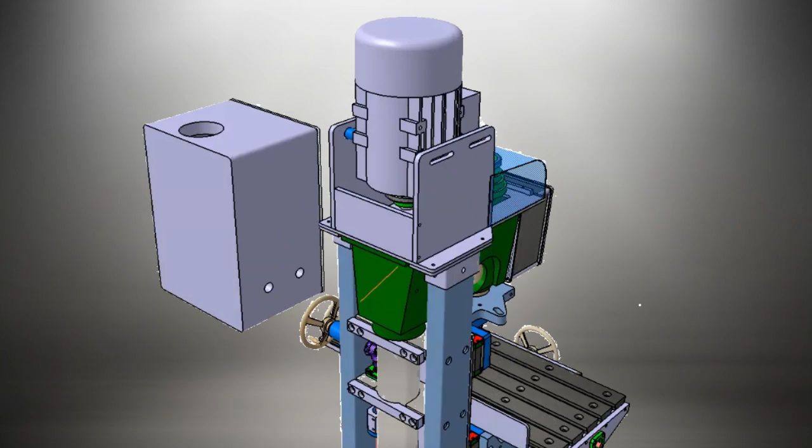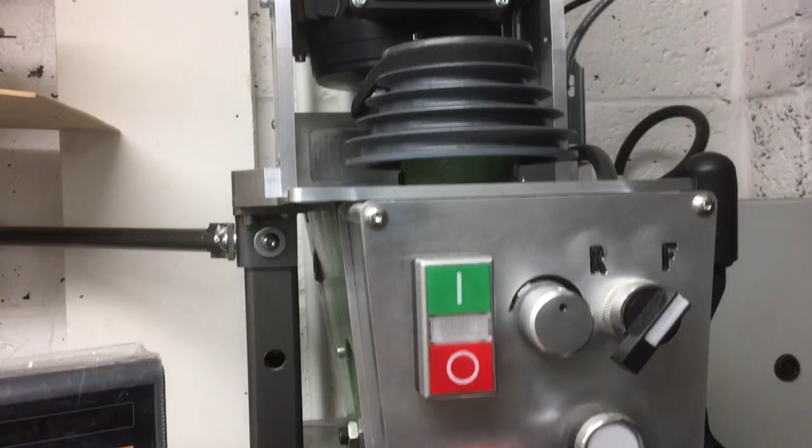In this video series we're upgrading your regular drill press, adding a load more features. First off, we replaced the single phase motor with a 3-phase motor up on top, made all those mounting plates, then we made a custom control box on the front here to control everything, and then we hooked it all up to this electrical cabinet.

In there we've got our inverter that runs the 3-phase motor, there's a power supply that runs the logic relay system, and there's a safety over-temperature relay in there as well.

We also got the digital readout display mounted on the arm and the encoder mounted on the back of the machine. In the last episode you saw me finish off this crank assembly, so we've got the bevel gears mounted on here, so when we turn the crank handle we turn the ball screw and we can raise and lower the table. So next up we're going to make the big block that goes here, sits on the ball nut, and connects onto the back of the XY mechanism to allow it to move up and down.

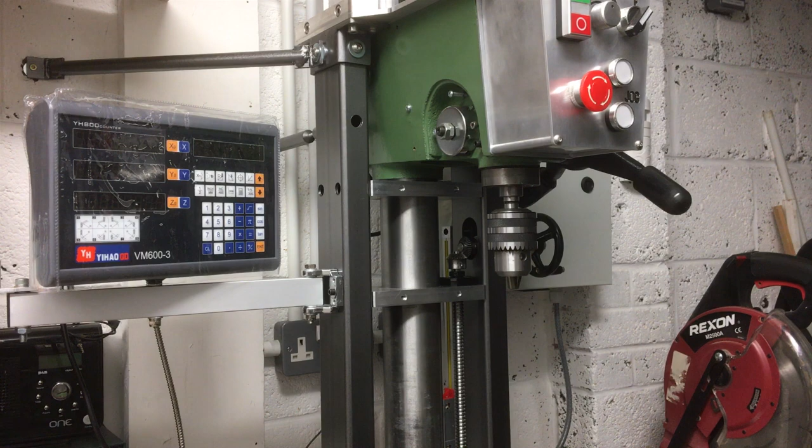So let's go over to the workbench, have a look at the material and the drawing, and let's work out how we're going to approach that.

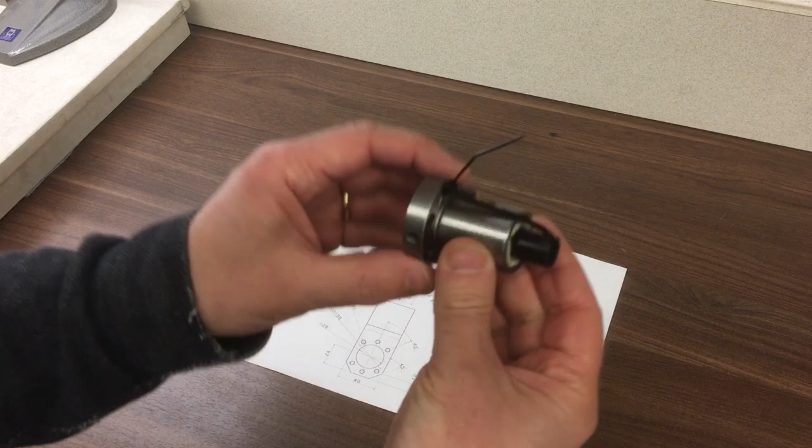Okay, so this is a picture of the part we're going to make. This is a ball nut bracket, so it connects between the ball nut and the part of the XY table. And the ball nut itself looks like this.

This is a 16mm 5mm pitch ball nut, pretty standard item. So you've got your 6 mounting holes there, and then all the recirculating balls go around inside there. It's got this little retainer to stop them coming out.

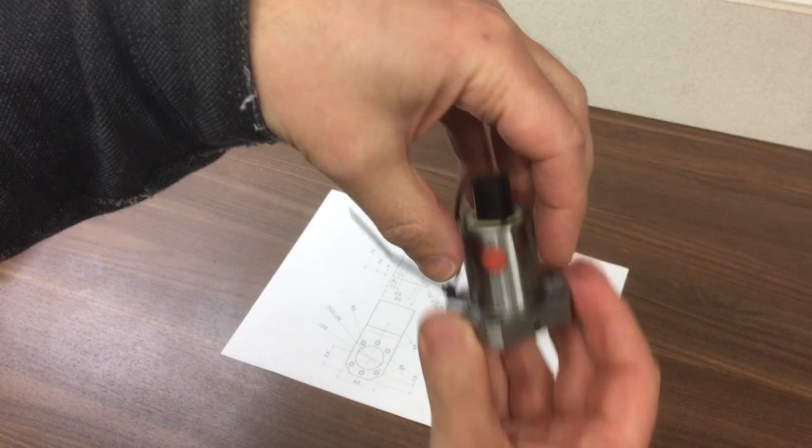That mounts onto the screw, and then the little ball bearings allow it to move up and down nice and smoothly. This is actually upside down, but effectively that will go into there through that big hole, and then it's bolted on at the 6 locations, and then when this moves up and down, it moves the bracket up and down, and this part goes onto the back of the table.

So as you can see, it's not massively complicated, it's just quite big and bulky. Some of the challenges are I'm going to be using this 6mm 2-flute aluminium end mill, so it's got, I think, a 45 degree for aluminium, 15mm flute length - it's not that long - and the overall length is 50.

There's going to be some challenges, it'll be sticking out the chuck quite a long way, or the collet, to enable me to get all the way down there, because we've got 23mm, so that's going to be somewhere up here. But I think we can just about do it.

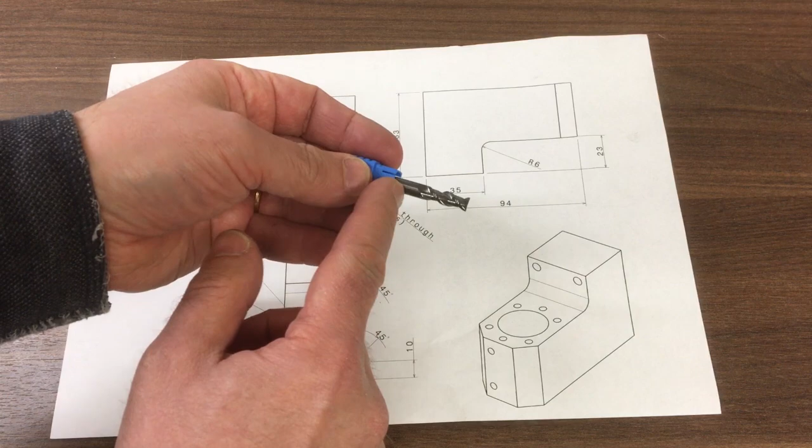We'll just take our time, and then we'll machine that pocket out and run the CAM operations on that. So in terms of stock, I bought this piece off eBay a while back.

It's a solid billet of aluminium. It's about the same, it's pretty square. I think it's about 101 by 101 by, let's have a look, I think it's like 50, something like that. Yeah, give or take 50.

So the first job's going to be just machining this down, just so we've got the blank size correct. And then once we've done that, we can go into the CNC part of the operations.

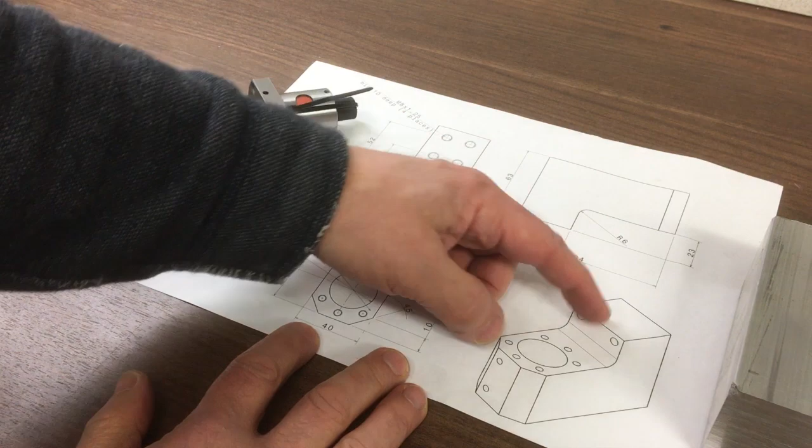So I think what I'm going to do is just rough this out with an adaptive first, a 3D adaptive, and that'll take most of it out, leave a millimetre - I think I'm actually going to leave 0.5 millimetre on the wall. And then we'll come down with a contour, and when we get to this curve part, I'll do that in...

Well, I've got 2 CAM operations that I've programmed in. One is about 0.2mm, and we'll just come down in small steps, and it will leave a kind of very faint staircase type effect on that.

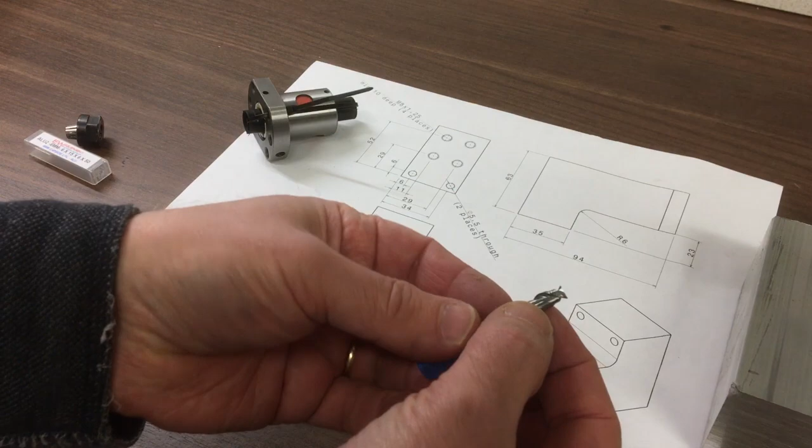So because this is just a regular end mill, it's not a ball nose one - we'll come back to that in a minute. So it'll take that down, and then I've got another cycle which is 0.1mm, which will take a bit longer.

So the idea is we'll run the 0.2, see what it looks like. I mean, it's only a cosmetic finish, it's just to make it look nice around the corner rather than leave a sharp edge.

And we'll see what that looks like. I might just hand finish that, or I can run the 0.1mm. So we'll have a look at that when we get to it.

And then there's just a horizontal surface operation here, and then we'll come in and just take a pocket here about 10mm deep. There's no way I can bore that through there with this end mill, not a chance.

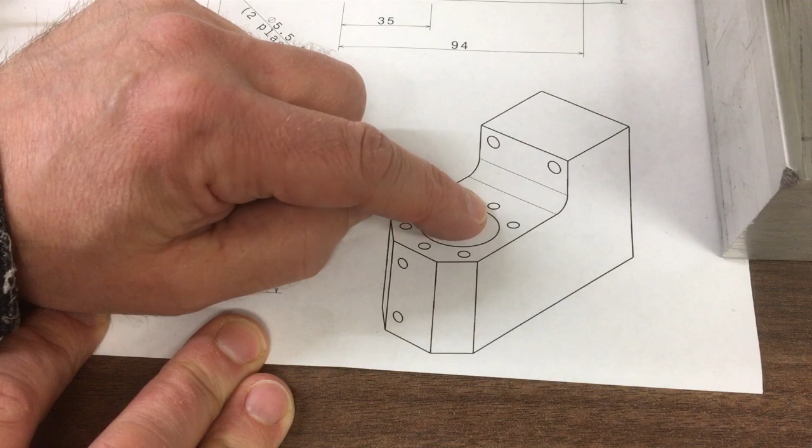So we'll take that through, leave about 2mm on the wall, because once we've spotted these 6 holes, we'll then put it on the 4-jaw chuck, hold it, centralise it using the dial test indicator, and pick up off that diameter there, which obviously it's got stock to still take out, but just pick that up, centralise that, and then we'll use the lathe just to bore it all out to the final size.

Then once we've done that, all we'll do is then open these holes out to the final size. I'll probably just use a cordless drill because these larger diameter drills, that spindle doesn't do very well with those. It tends to bog down. It's really a high speed spindle for small stuff. So I'll just finish those by hand and then tap those, and that will be it.

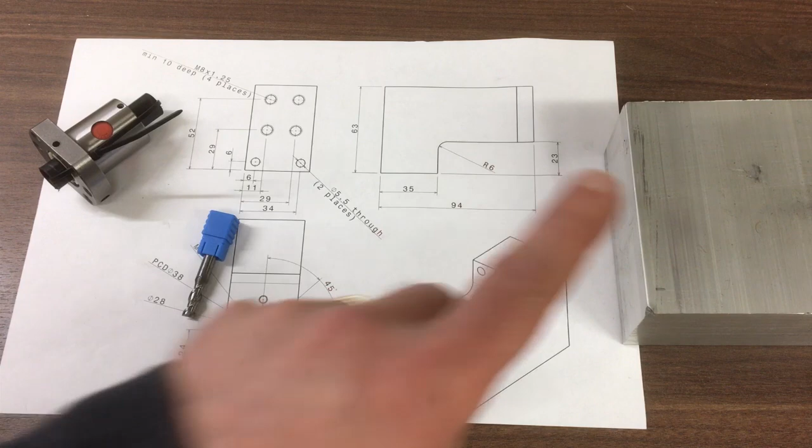So I think the big part of this operation is going to be just getting that down to the final stock size. So let's go and put it in the vise and start machining it down.

So I've got it clamped in the vise. Luckily I had just about enough travel. Now somebody's kindly dropped this on the corner, so we'll use that as the piece we're going to chop out. There's two ways you can do this. One is that as you're squaring it, you're also bringing it to size.

But the way I prefer to do it is to take the minimum off, bring it to a square size, measure where you've got to, and then with a perfectly square block, bring it into dimensions, sort of split it into two stages. I find that a little bit easier to do. So this is going to take a little while. Let's get started.

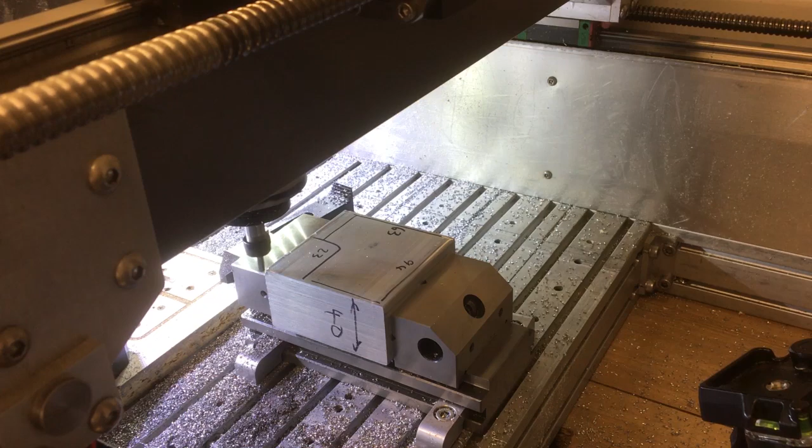Well, that wasn't a good start, was it?

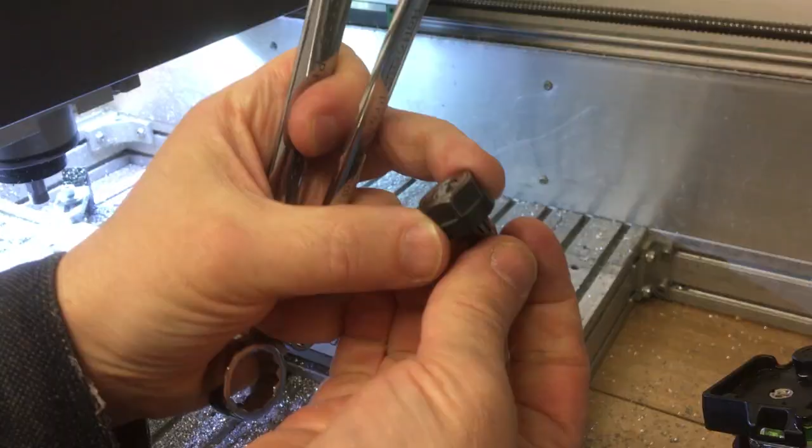I don't think the depth cut was that much. Maybe it was a bit high feed rate. Luckily I've got another 5. Back in a minute. Right, what happened was I didn't tighten the collet. So as it went into the work, it just pulled the end mill down, and that's why it engaged so much. I thought I didn't put that much depth of cut on. Right, let's get another end mill in and tighten it up. Back in a minute.

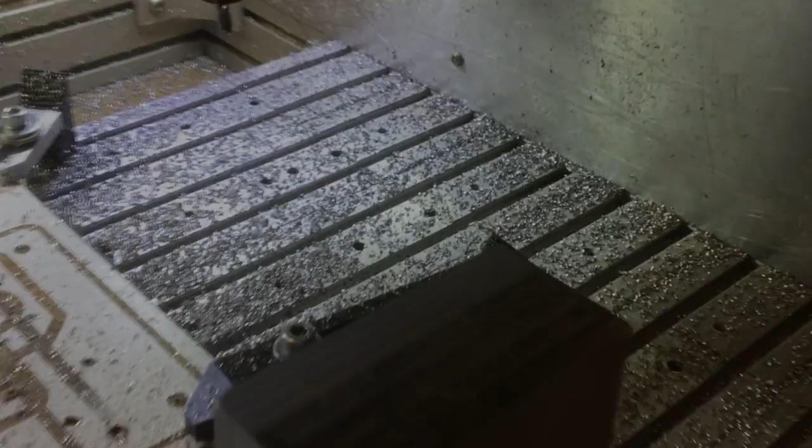I'm only skimming over it quickly, but it's not too bad a surface finish, considering we've only got a tiny end mill. Okay, let's take it out and see how square we are.

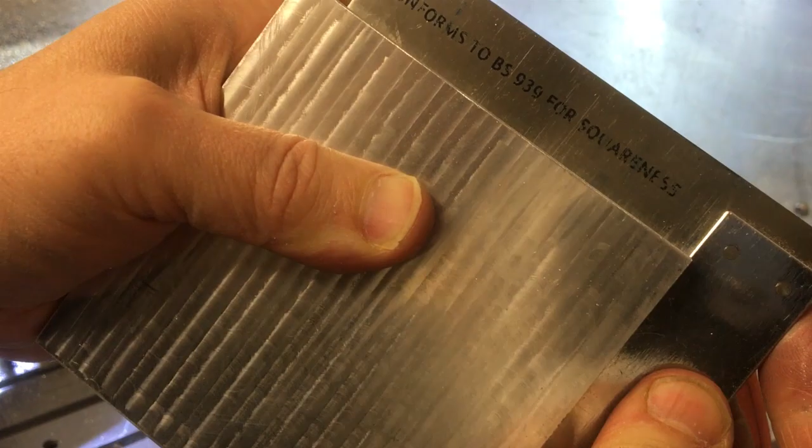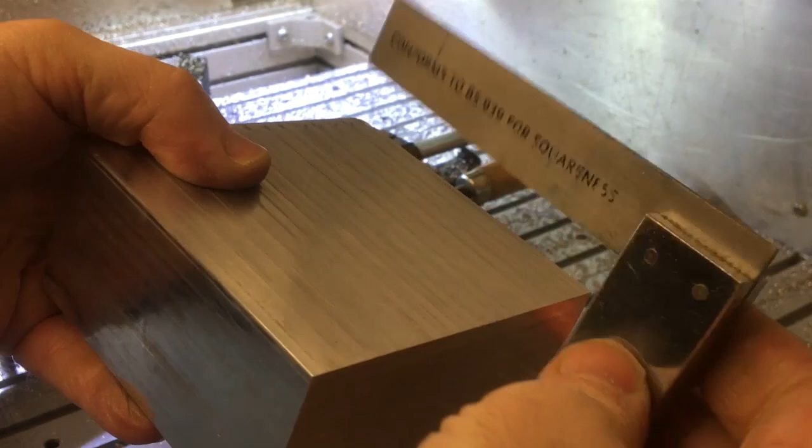Okay, looks good. Okay, across these sides. One, two, three, and 4. Okay, we'll call that good.

So obviously it's not to the final size, but at least it's squared up, and that piece, where the end mill pulled out the collet because I hadn't tightened it up, we'll make sure that that's part of the scrap.

So I think we'll datum off here, mark it up. In fact, I think what we'll do is just pop it in the vise, remove that, we'll bring it down to final thickness, so if that surface feels alright, that'll be our datum. We'll bring it down to I think 40mm, and then we'll start marking it out.

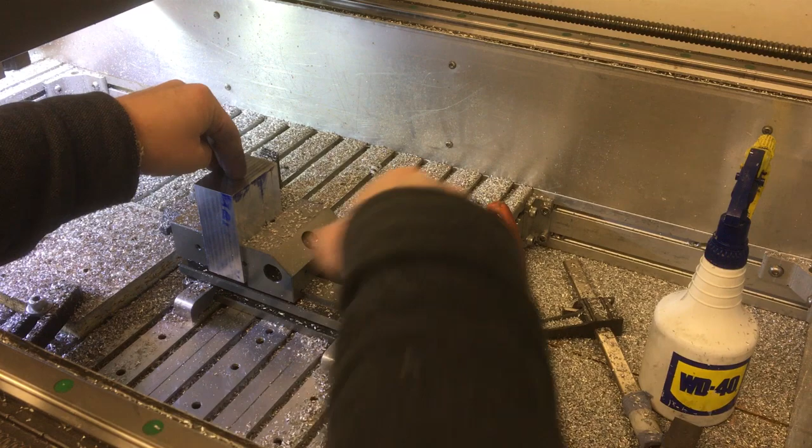Okay, then eventually we get down to our final stock size, so we'll take it out, check we've got the right dimensions, then we'll mark it up, ready for the cam operations. Alright, let's go and check the measurements.

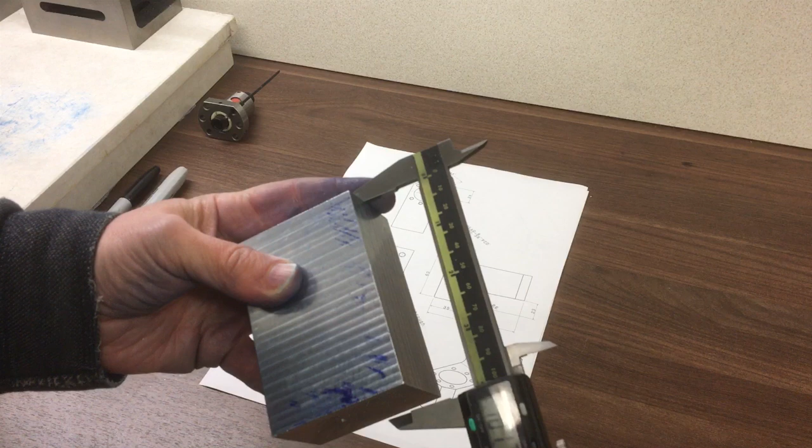So we should have 40mm wide. Yeah, okay, it's fine. 63 wide. Okay, that's just touching there. And 94 long. Somewhere there, I think, just square.

Yeah, okay, brilliant. We're down to our final sizes, so we're going to CNC the last parts here, but just so we know where we're going and make sure I'm not going to make any errors, I'll just mark it up anyway, at least with these two lines with the Sharpie. And then we'll start the cam operations.

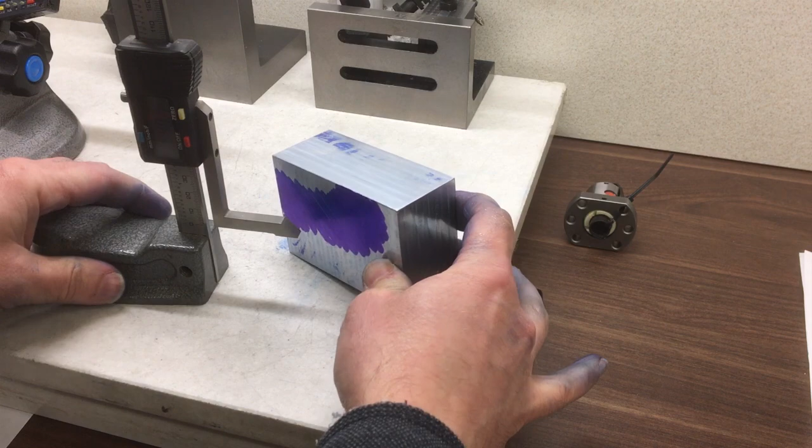Okay, so here's our 40mm line.

Okay, and the one here is 35. Just from there. Obviously that'll have a radius on it. Now we just need to chop this out. Right, see you at the CNC machine.

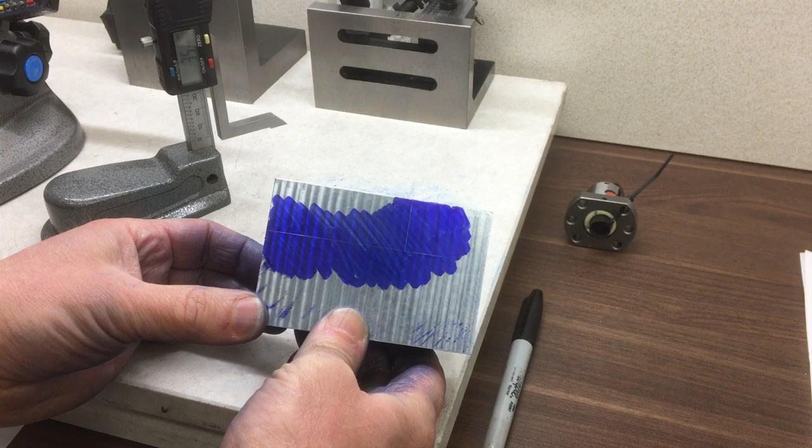Okay, so before we go too much further, machine a lot of the block away. Now we've got quite a lot to hang on to. We'll do these two 45-degree chamfers down here, and then we can get on with the main machining.

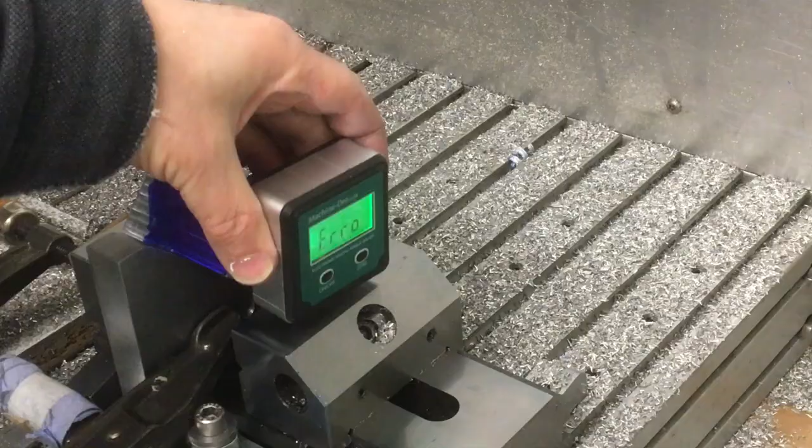So just to check, I've just got it set up against this block here that's pretty close to 45. Okay, we'll just make sure it's 0 on there. Now this is not super accurate. I don't have a sine bar, but it's only a cosmetic feature, so hopefully this will be good enough. There we go, depends on the exact position - 45, 45.1. Right, let's go for it.

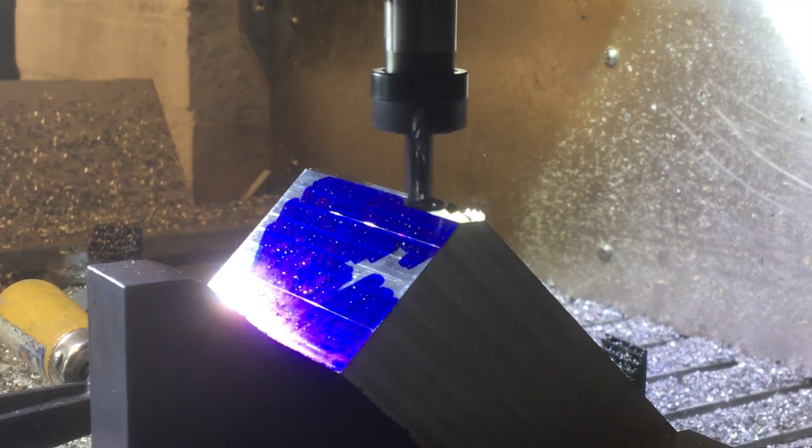Got the part up on these shallow parallels just to give me a little bit of height off the jaws, and then we've touched the tool off on here, zeroed it there, zeroed on the back and zeroed on the top. Now we've got quite a lot of hours in this part, so before we run the cam cycle, what I'm going to do is put x equals 200 at this point, and then move the machine over to the new x0 over there, and then we'll run what's called an air cut.

So we'll run the G code in mid-air, just have a look and see what it tries to do and make sure it's doing what we expect, and then we'll bring it back. So in our DRO we're going to type x equals, let's say 200.

Okay, so now it thinks the part's actually over here, so we'll move it back to 0. Sorry about there. So we've just got to remember we've put that offset in, so it should start machining over here. The other thing you'll notice is I've got a lot of stick out in the end mill because we've got to reach down a long way.

So we're just going to do it in stages and see how we go on. It should be okay. It might rub ever so slightly at the top here, but not much we can do. We've only got an ER11 with a 6mm end mill, and that's about as long as you usually find.

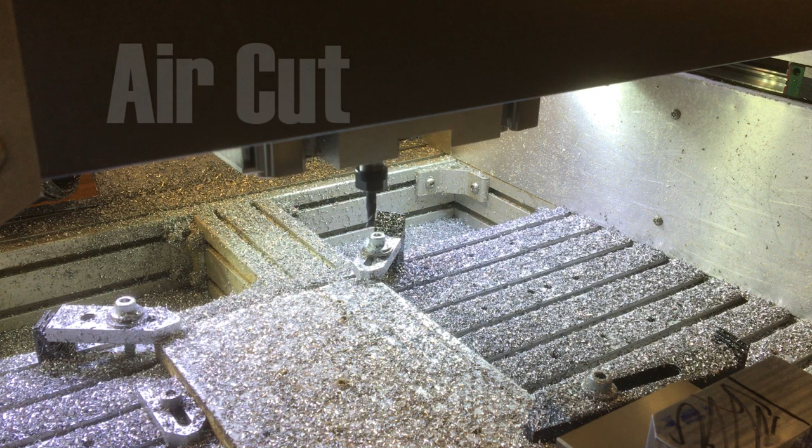Right, let's run our air cut. Okay, we'll hit cycle start and see what it does. Okay, we won't run it right to the end. That looks like it's going to behave itself. So let's set it back and cut the part.

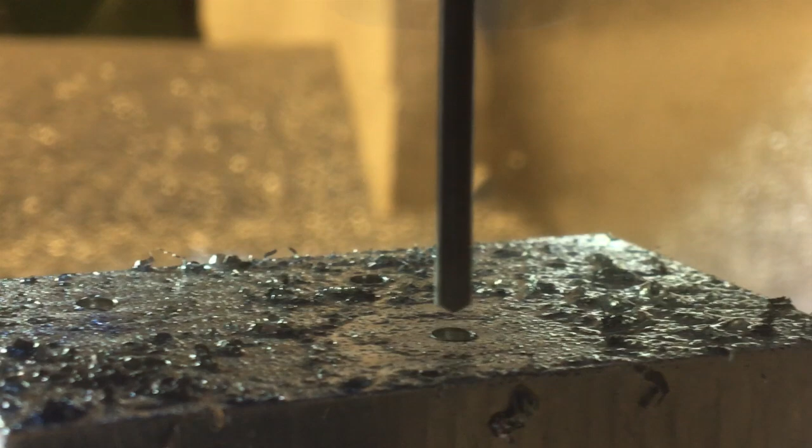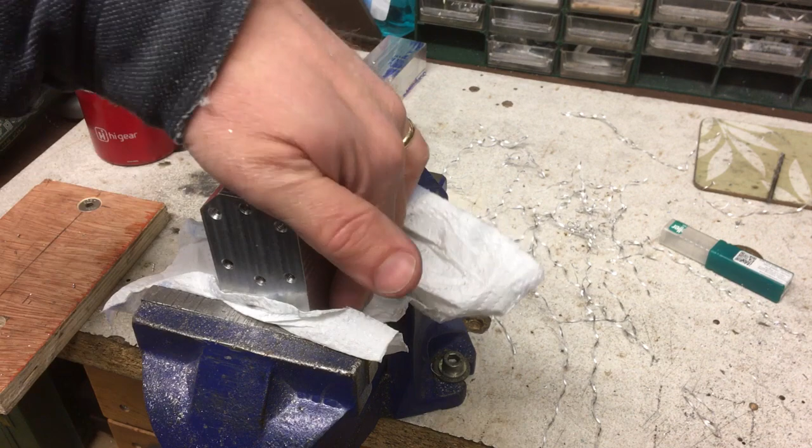Okay, it took an awful lot longer than expected just to machine everything down to the right size and then drill out these holes in the pocket around the back and all the sort of 3D adaptive stuff around here. But we're there now, so we just need to tap out these holes and then we'll go over to the lathe and drill the centre part.

So I spot drilled these on the CNC machine 3mm. Then I'll just open them out to 4.2, which is the pilot for a coarse M5.

Now I have just started these using the drill and then just using this little guide to get them started so they're square. And now I'm just hand tapping them. I prefer to do it that way just in case - well, it tries to avoid breaking a tap. You've got a bit more feel if you do it manually.

Yeah, you never know what length you've got, and it's annoying to bottom out and then you could crop them to length, or you'll come back in and set it all up again. So plenty of thread on them. Right, I'll finish these out and then I'll see you on the lathe.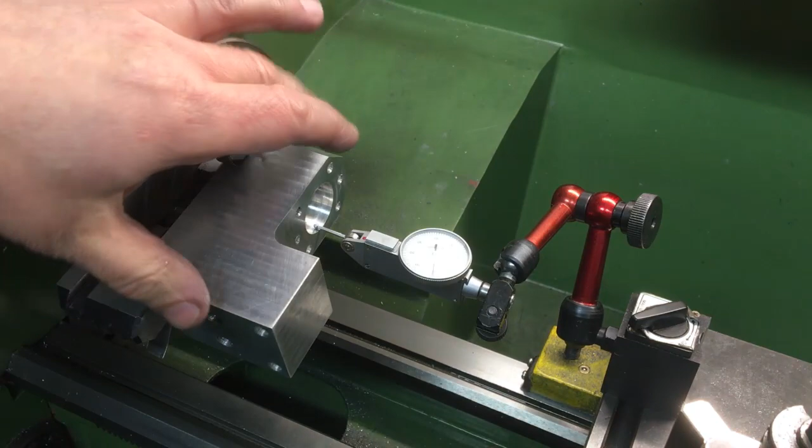Okay, it's a little bit awkward to set up, but we finally got it set in the 4-jaw. So we CNC machined that bore with a little bit of stock to remove there, just to give us some guidance. And we just about got it zeroed and dialed in, about 0.01 or so, bit of fluctuation. But that's okay, it's just a clearance hole for the ball nut to go down.

Yeah, pretty pleased with that.

We've got to be careful here because there's a few things. It's going to be a little out of balance, so we might have to run slower. This is sticking out a long way, so when we bring the tool post in for boring, we've got to watch how far we can go - we'll need to stick the boring bar out quite a long way. We need to make sure when we come through the back, we don't hit the back of the chuck. And since we're hanging a long way below here, when we bring the carriage along, we need to watch we don't hit this part of the saddle as it swings round. So we'll check all those clearances and set things up so we know we're good to go, no clashes.

Right, so the first thing is we'll put our centre in there and gently drill out our hole, because we're holding it back here and trying to drill and do some operations on the material out here. It's unlikely, but I don't want it to grab and suddenly flick out since we're just kind of hanging on the back of it. So we'll take it easy and get it done.

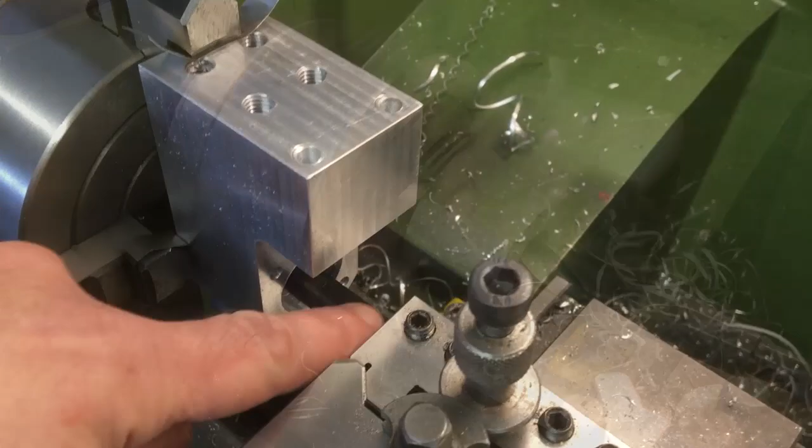As you can see, I've got my boring bar sticking out a long way, and we needed clearance as we go through these little screws that hold the gib in place on the top slide. So we've got clearance there, clearance at the bottom, and I can just about see in there.

That bore comes out right next to the edge of that step on the jaw, so there's a little relief, then the step. So I'm going to stop it just short and hand finish it when it comes off. We've currently got that set to about 0 - I'll stick it out, there it is. The boring bar's just got to the bottom there, so we'll take it out and go to 0. That makes sure we don't machine into the jaw.

Very, very close. Right, so the last twist drill I put through there was 25mm, so we'll open it out to 28.1. The ball nut's 28, and that gives us a little float and adjustment when we put the whole thing together. Right, let's get boring.

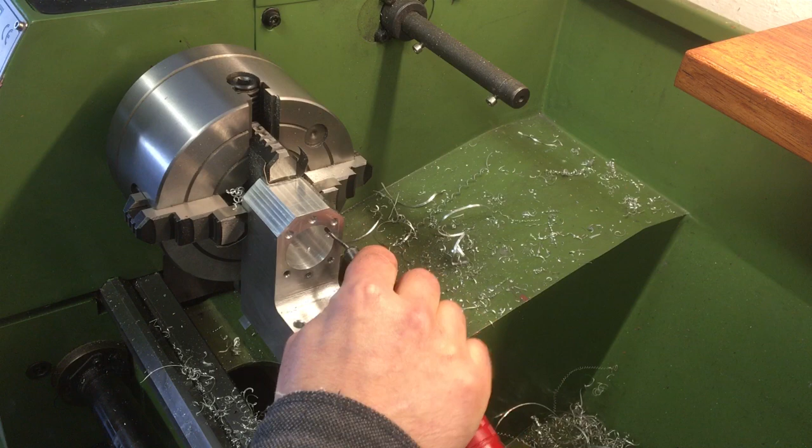Right, just deburr that edge and then we'll see if the ball nut fits. Okay, here we go. Should be a little bit of wiggle room for adjustment. There we go. Perfect.

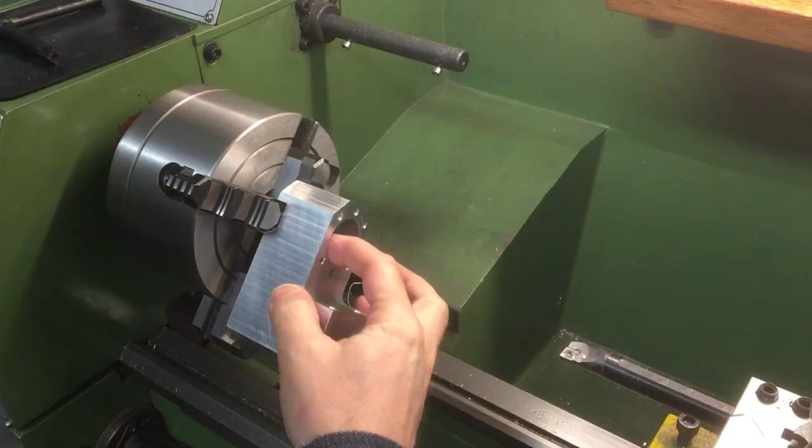Okay, and there's the bore completed. So we'll take it out of here, clean up all the edges, deburr it, give it a clean, and we'll see you over at the bench.

So when it was in the 4-jaw, one of the jaws was holding here, and it overlapped around there, so I couldn't drill all the way through. I don't know if you can see that, but there's just a lip of material remaining. So we'll use the step drill to take that out, and then the snail countersink to take off the last bit.

Nearly. See if we can get the last bit off with this.

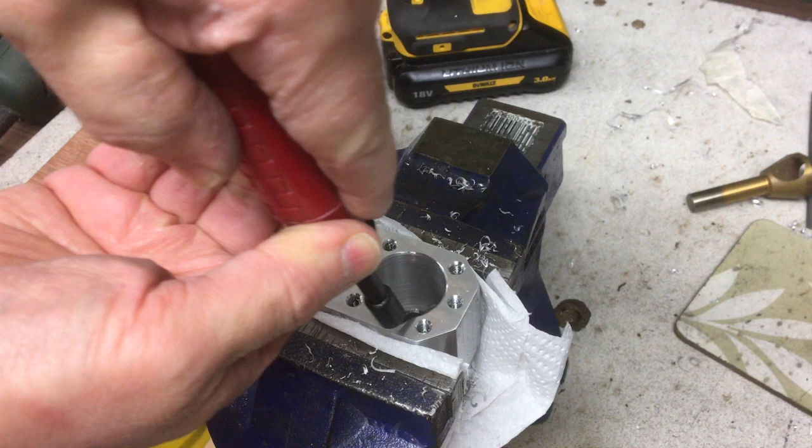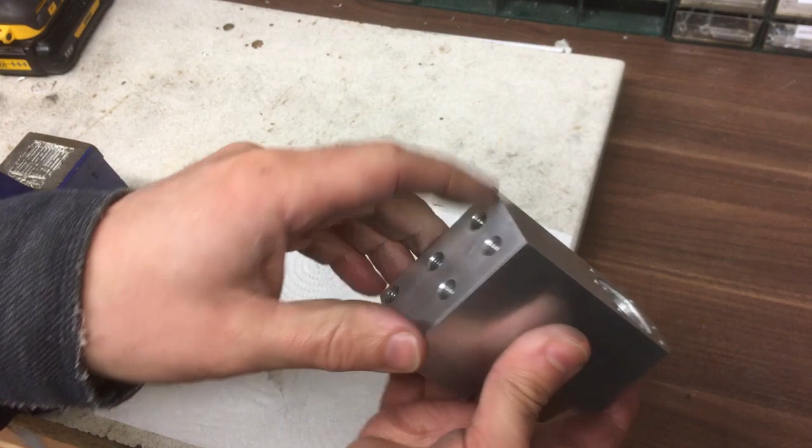And here it is finished up. So I've got all the holes tapped for the ball nut there and the ones that go onto the table. You'll notice I've also got them marked out on the bottom because originally I was going to put the ball nut on the bottom so all the forces were pressing down onto that flange. But I realised it would have made it very awkward reaching round underneath to get to the back of these screws to put it in. So I marked it out on both sides to give me the option, and I've decided I'm going to put the ball nut on the top like that.

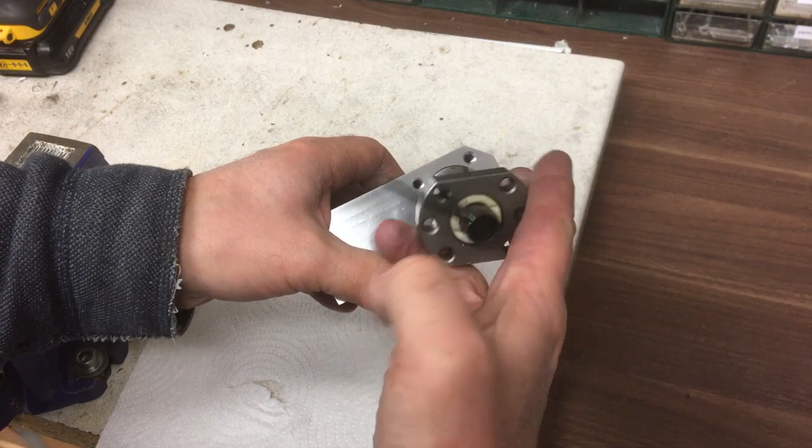And then I can just reach through the slot and have easy access to these. It does mean it's pulling down on those threads, but I don't think that's going to matter.

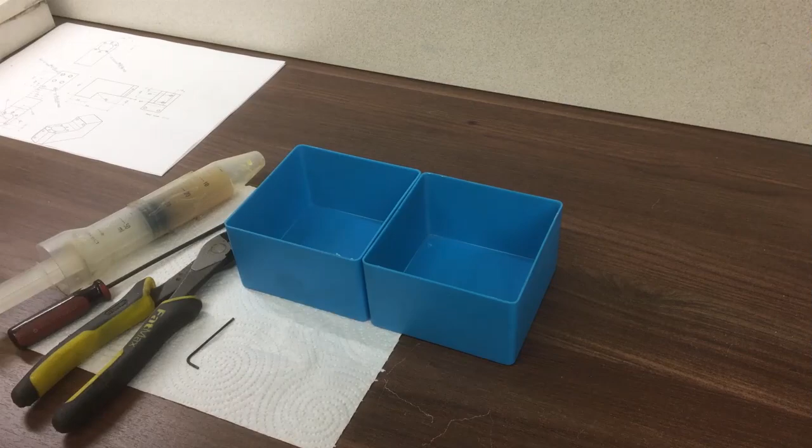Right, so next we need to get this mounted onto the ball screw. Actually, before we fit it, we'll just strip it down. We'll take all the balls out, take these end retainers out and the little guide tracks there, give it a good clean, and then rebuild it.

But before we start that, I've just had a delivery of this coffee and walnut cake. So, see you in a minute.

Very nice. Right, so let's get this done. We'll take the plastic sleeve out that stops the balls falling out. That's pretty clean.

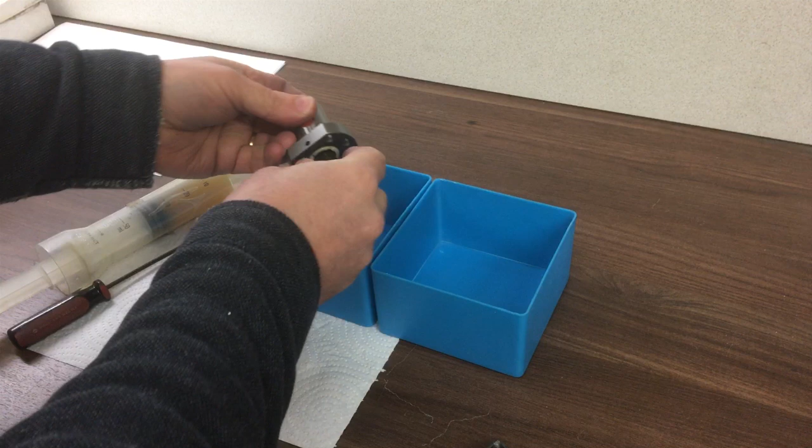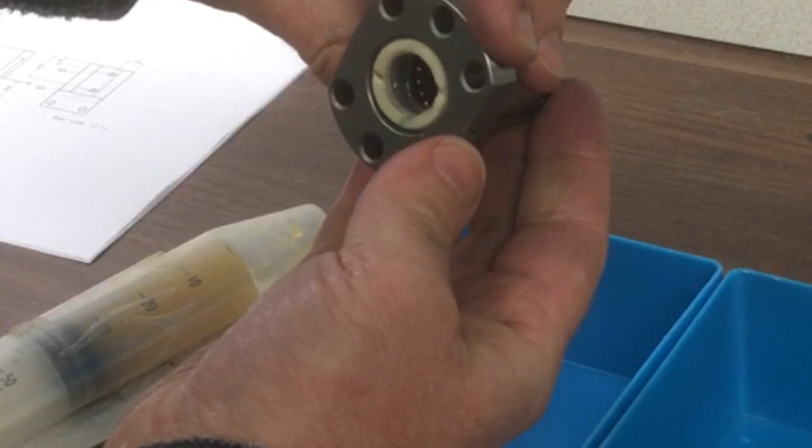Doesn't look too bad in there actually. Nope. Right.

Take these end pieces off, it will help.

You might be able to see, yeah, there's quite a lot of dirt on those little orange guide tracks there. We'll strip it down and give it a clean.

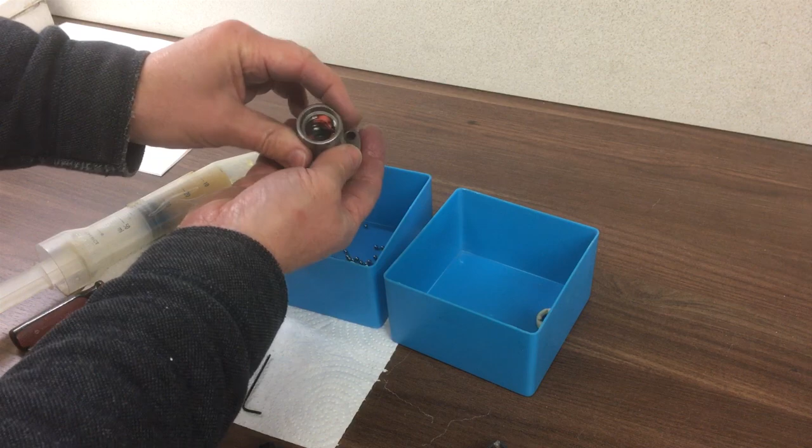Okay, now it's empty, that's what we got. Actually, that's not too bad. I've seen a lot worse. Yeah, it doesn't actually look too bad. I'll give it a clean round anyway. It's actually got some grease in it.

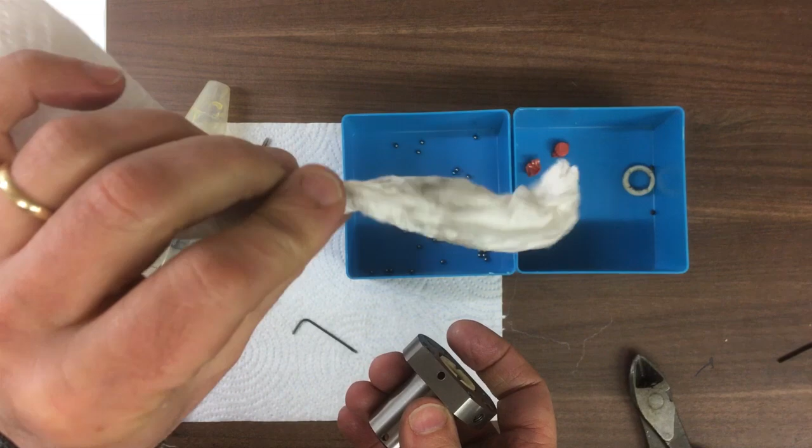Let's see what we find. Yeah, maybe not so clean. For an application like this, it's not going to get a huge amount of use. It's not like it's on a CNC machine where it's doing lots of rapids. Probably would have been fine without cleaning it at all, but at least I know it is clean and I haven't got any grinding dust in there.

Looks like lithium grease. Call that good. Alright, let's rebuild it.

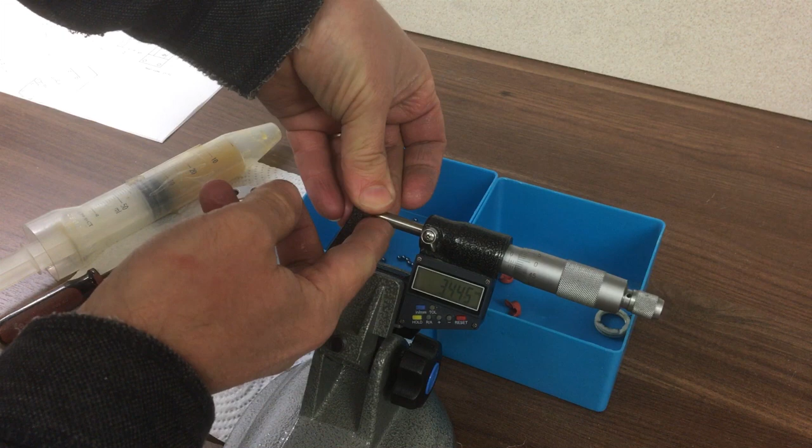Here we'll just measure the diameter of those balls in there. So they're normally around 3mm, but they're actually 1/8 of an inch, so 3.2 or thereabouts, or 3.18 perhaps. And then they have a tuning range just to get them best fit on any given ball screw. I was hoping I don't drop it onto the floor because we'll never see it again.

Luckily it keeps rolling down there and into the pot. There we go.

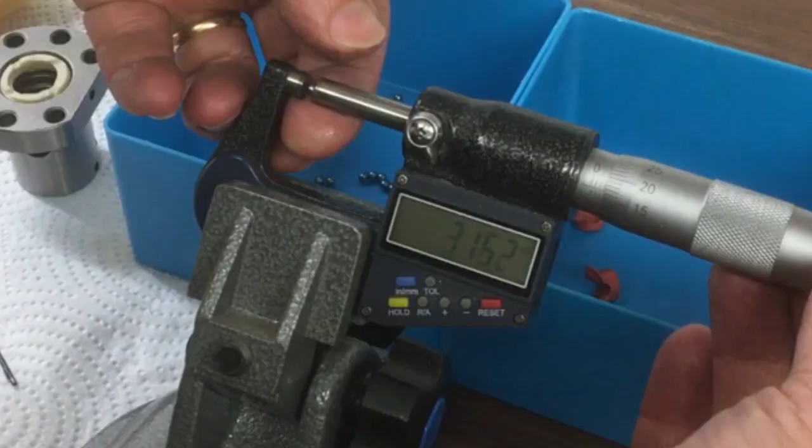So 3.16. And it's nearly 1/8 of an inch, just a little bit under. Should be 0.125, wouldn't it? So they vary slightly from around the 3.18mm or 1/8 of an inch, just to give them the exact tuning they want onto any given ball screw. So they are tailored, so usually you can't mix and match these. If you put this on another ball screw, it'll probably be a little bit baggy or a bit tight, so just watch that. You can't usually mix and match.

Let's just pick another one at random. I'm guessing they've all come out the same batch and they're all going to be about the same. Yeah, about the same, aren't they?

Right, let's rebuild it. First thing to do is just put these little guides back in. And that's the last guide in.

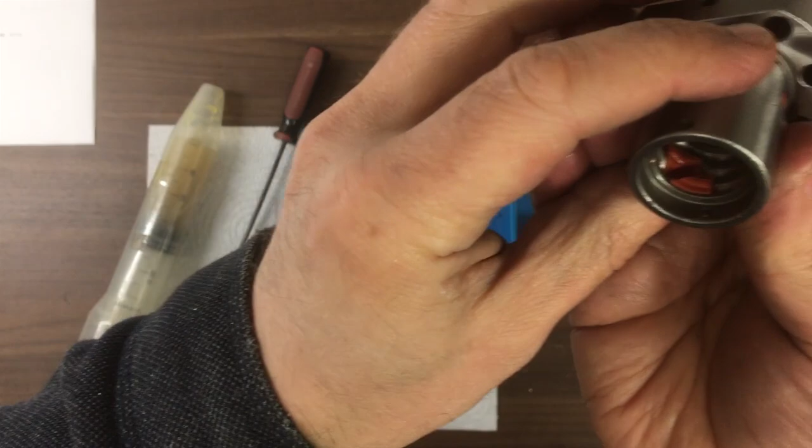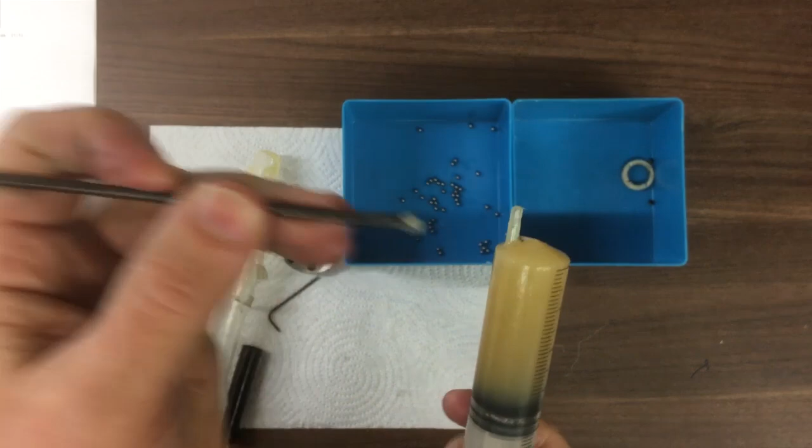Yeah, right. So the trick to get the balls back in is we're just using this grease. I think this is a lithium grease. I've had it a long time. And you just get a little dab. There we go. A little dab on the end of your tool. You can use a wooden toothpick or something. This long screwdriver I think works for me.

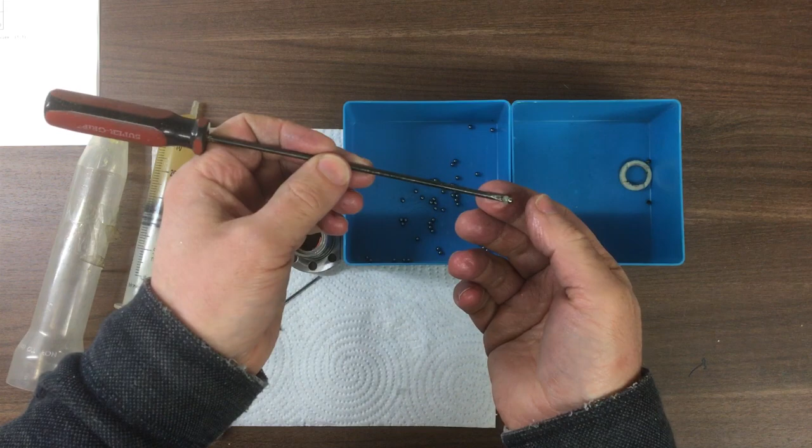And we grab one, and we put it in here. I'm going to try and load it from the back, which is down there.

Okay, we're about halfway through now and you can see it's starting to fill up. Right, keep going. That's a bit better idea.

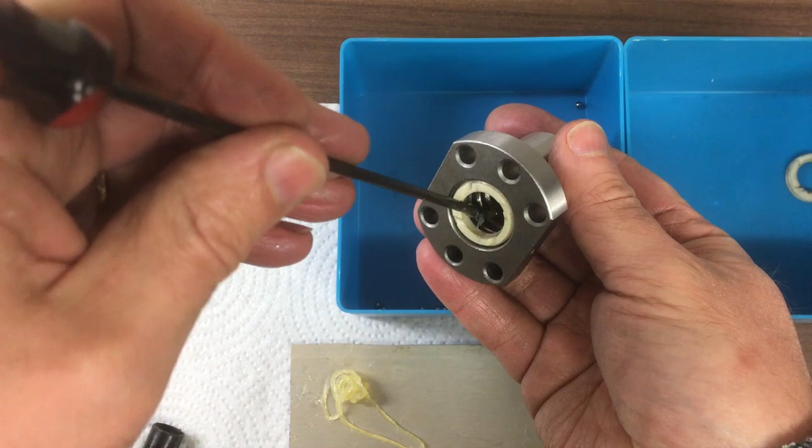It's important when you do this, always hold it over the bowl, because if it goes, or your little box, if it goes onto the workshop floor, you'll probably never see it again.

And the last one. And we'll see if I've done it right. Yeah, it should go in there. I think we got it.

So you'll notice it doesn't fill right to the front here. So although these little grooves are machined all to the front, you don't have any balls right at the front here because this little guide then sends it onto the return to go back the other way, and the same when we go this side.

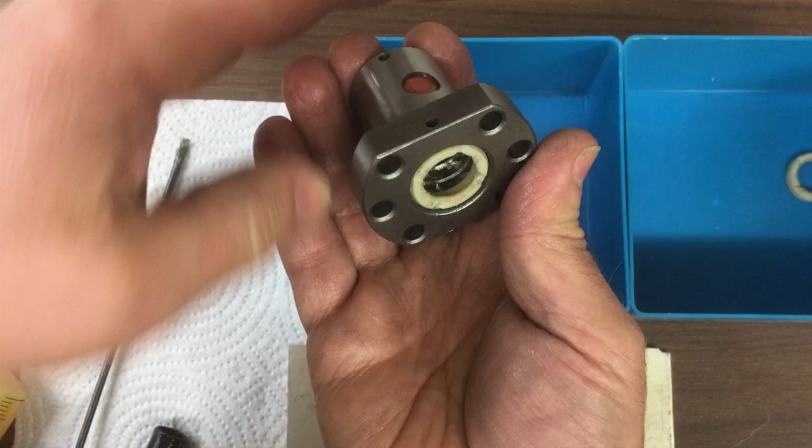There you can just see. They don't go all the way to the front because they go onto the return guide to go back round again.

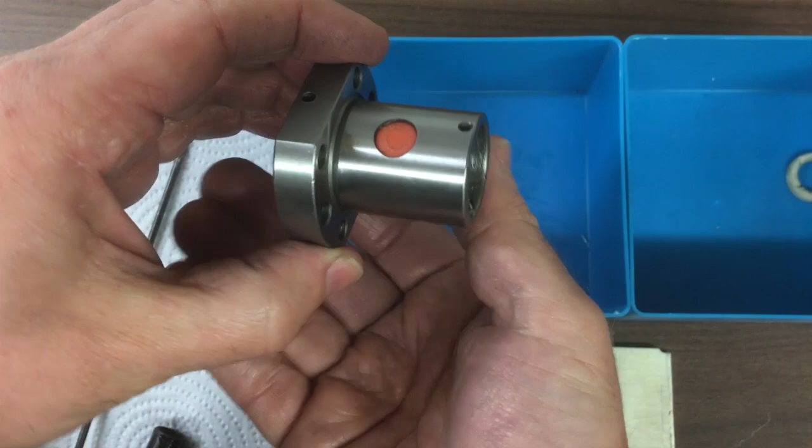Okay, done. Right, we'll just put the retainer on the front and then it can go onto the ball screw. Now, rather than disassemble this, because I've got it set just right so it gets a good engagement, we'll just leave it there and then we'll just see when it's installed if we can get the ball nut onto there.

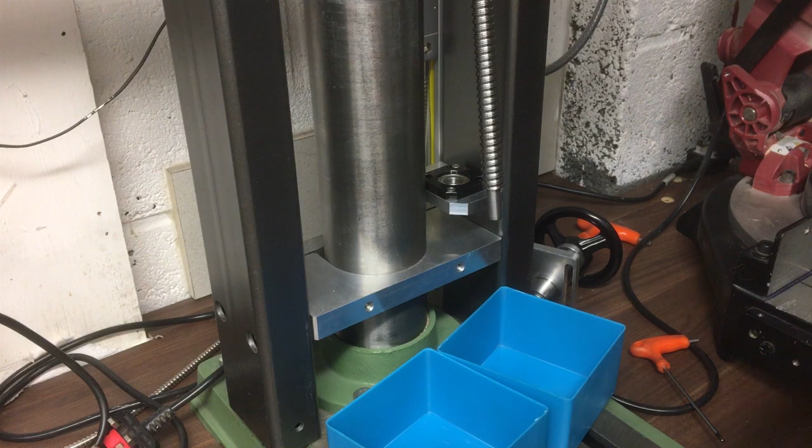And we got our tray just in case any fall out, because this doesn't always go smoothly. Should. Sometimes they can bind up and just jam a bit until they're finally seated properly.

I think we're there. We are. So at this point you hope you haven't put it on upside down. There we go. Yeah, feels good.

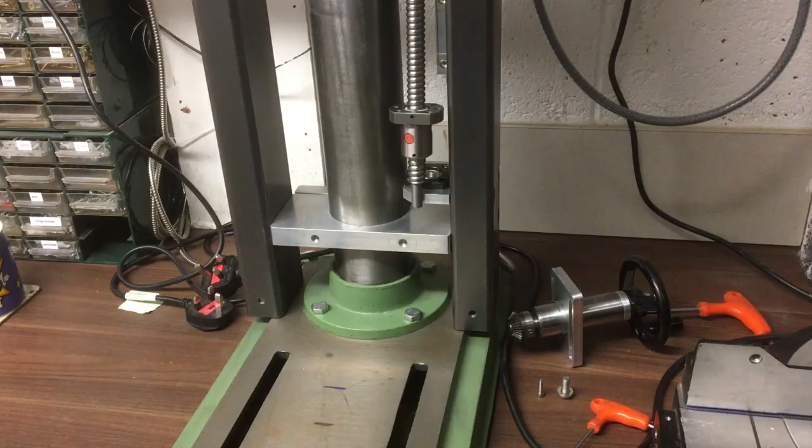Right, now which way around do we want it? Grease fitting there - I think we're going to have to access it from the rear, because if it's there with the plate on the front I won't be able to get to it, it'll be in the corner. So we'll put it that way. In fact, let's fit that now. There should be some in here - this is a box where I collect lots of different bits and pieces. I think that's the same, let's try that. Oh no, here we go.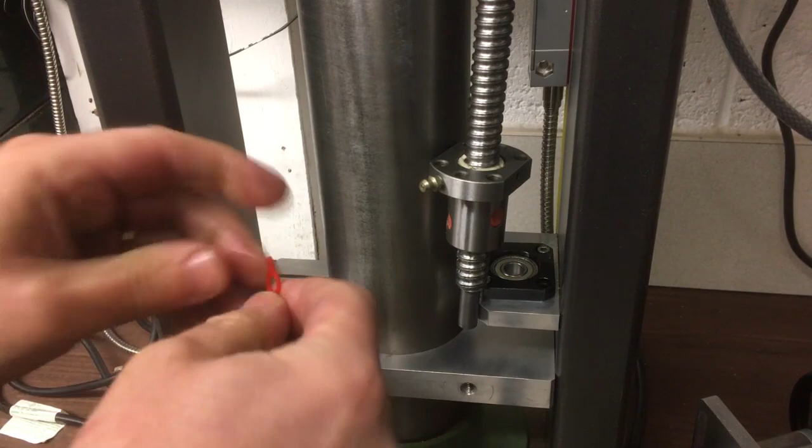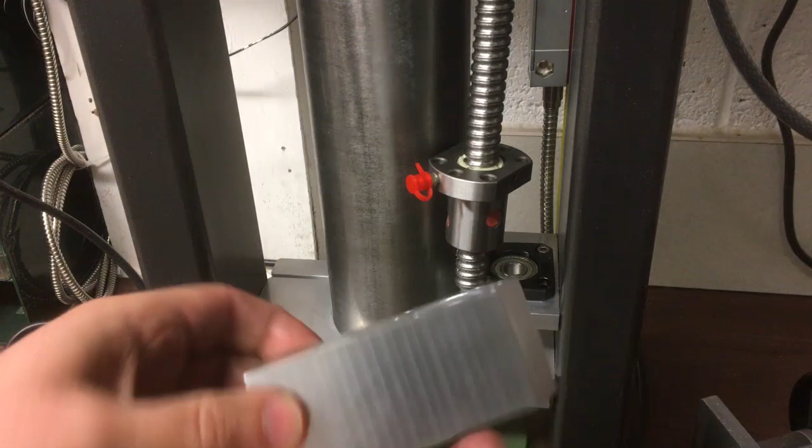I'll put a little dust cap on it. There we go. And then a little bracket - I'll say little, it's quite big. I'm not going to get to that either. I thought it was going to be over here. Put it like that.

Always the little things, isn't it? I definitely can't get to that. And I might be able to get to that through the gap here. Alright, we'll put it that way around.

These are M5 cap heads. Nip it up for now, it's not quite in its final position. Okay, there we go. Alright, let's give it a test run. So obviously this will just spin round, so I'll hold it.

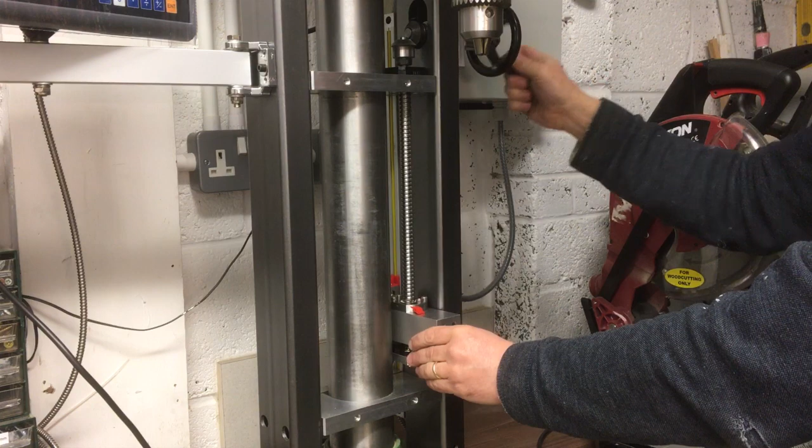Great, yeah, it works. I was a bit worried about how long it's going to take to move up and down, but right, let's time it - start the clock now. Bearing in mind, I don't think I'll take it right from the top, so it'll probably be too close to the chuck. Takes that long. Very happy.

Nice, well that's it for this video. It took an awful lot longer than I was expecting to machine this block, but we're there now and it works, which is the main thing. Very pleased with it. I've had quite a few people comment that they're quite interested in modifying their own drill press, so they were having a look at my videos just to get some ideas, which is great.

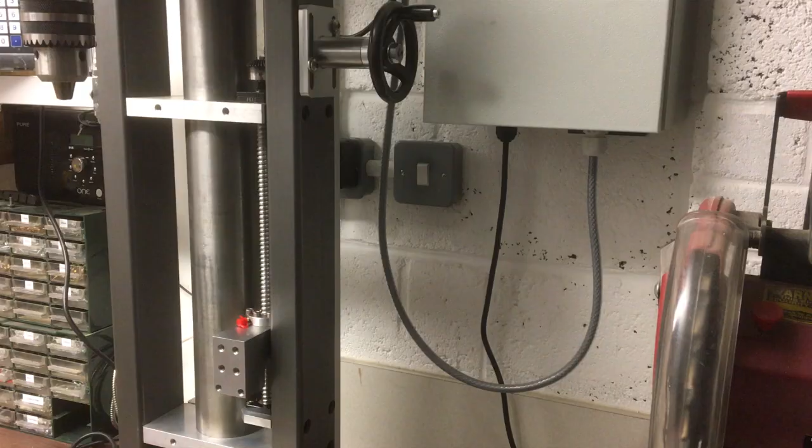Next time I think we'll have a look at the plate that goes on the front here. So this is the stock for it, 6mm aluminium plate, that'll go on the front there. It's got to obviously be machined to size, and then there'll be a slot down there for that ballnut bracket to come through, and then there'll be two of these linear rails - these are the Machifit rails on the front there, and I think we've got 6 carriages on there, so 4 for the knee system and then 2 that are the guide system for the quill. And then the other thing this plate will have on it is some grub screws here to level it, because the box section's not super level, so it can bring it all into plane and get it aligned with the axis of the drill.